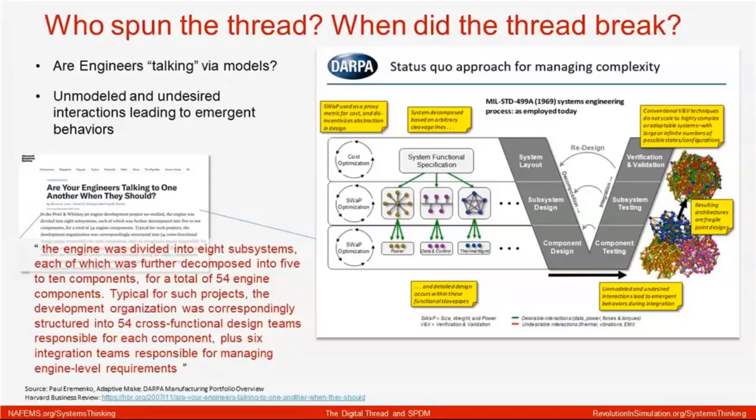So this study refers to two categories of interfaces laid out on a design interface matrix and a team interface matrix, to keep track of two types of interfaces: unattended interfaces and unidentified interfaces. Unattended interfaces being interfaces defined by the system's architects but lacking a corresponding team interaction. Unidentified interfaces being interfaces the team is working on but that do not exist in the system model. So the critical need for the simulation lifecycle manager tool is to enable this kind of interaction and keep both sides in sync.

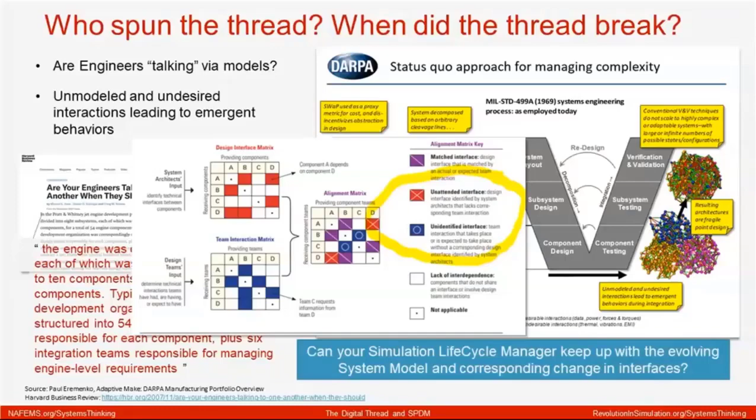When it comes to keeping the RFLP part of the system model honest, there is this search for a single source of truth. And this is something that is distributed physically, and even for systems of minor complexity, it's almost impossible to keep it in one physical box. It should be noted that the single source of truth is diluted by the assumptions made during simulation.

There is an equivalent distributed systems pattern in software architecture. It's called the enterprise service bus, where the idea of a logical concept of a bus is supposed to hold a single source of truth for all the software systems that are part of the interaction. Again, even in software engineering, that concept of the enterprise service bus is a distributed concept. There's no such thing as a single physical enterprise service bus. It is always distributed. The same thing happens here.

The equivalent in our world to the software world would be called a systems model. A systems model is not in one physical location. It is always distributed. So how do we keep track of this distributed architecture in a simulation lifecycle manager and keep it synced with the simulation model?

And while we do that, one of the challenges is that these models tend to be very multidisciplinary, and they tend to go around the various hierarchies on how we assemble the models in our product structures and in your simulation BOMs. And they are very multidisciplinary in nature, and also the abstraction varies. So if you think of the model complexities in each one of these three dimensions and along each one of these disciplines, the abstractions need to be made consistent between both the systems model and the simulation model. And that is one of the primary capabilities of a simulation lifecycle manager that needs to be kept track of before you merge it into the systems model. So that is a key capability.

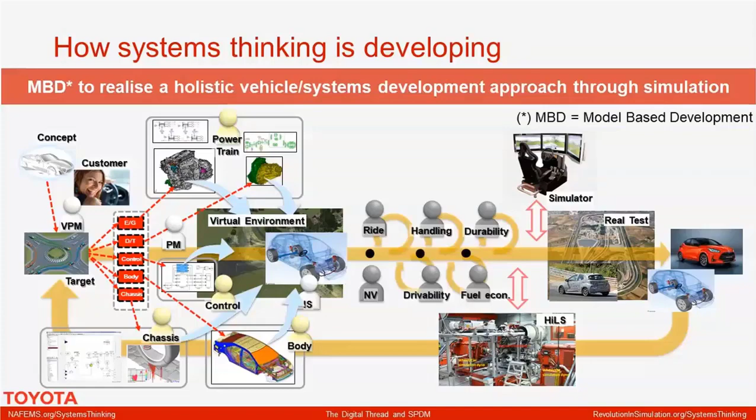If you have to imagine how this works in practice, this has to do with a huge amount of data flowing across different disciplines to realize such a virtual environment. However, the reality, from what I hear, not just in our industry, is that all these domains have their own legacy, their systems, their processes, and their data sources. So we have silos, these are complex data, and the result is that these require effort to extract and reuse in a holistic development approach.

So starting from this point, we tackled our proof of concept project on systems lifecycle. We concentrated on the scope to demonstrate the feasibility of improving the process between those who produce the data, like designers, and those who consume the data. So typically what happens when somebody has to realize a digital prototype is that the data, typically specifications, need to be gathered from a number of sources. The specifications provided typically by designers may be design targets or assumptions, or may come themselves from different data sources like CAD or test results.

Too often we see, maybe you recognize the icon, that our processes depend a lot on exchange of data through files. So our first goal was to reduce our dependency on these file exchanges. Our intention is to replace a process based on file exchange with a process where the information comes from a single source of truth for engineering specification, in a way that when this is fully developed, everyone can access the same place, and this would reduce the data gathering and review effort.

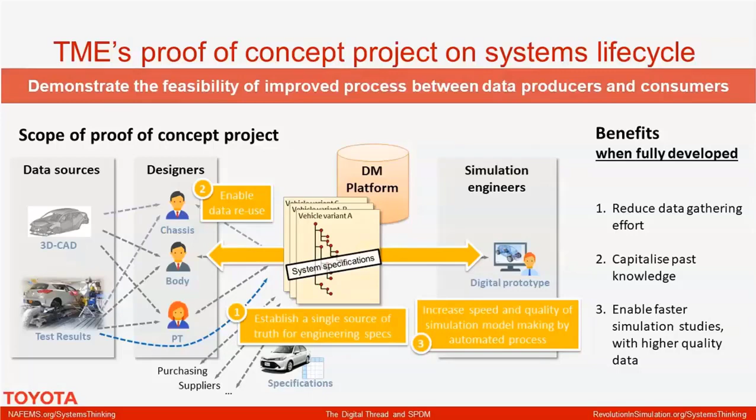Lastly, what we wanted to demonstrate is, once we have data there, whether we could use this to increase the speed and quality of the simulation model making process by automation, so that we could enable faster simulation studies with higher data quality. So this is the kind of scope I will be describing in the next slides.

I mentioned a single source of truth, and maybe some of you are asking, really? One more? Well, I think the data model we're intending should complement and integrate with existing PLM solutions. Try to bear with me on a timeline of typical vehicle project phases. The level of data detail typically increases. In the beginning, we start with requirement information, which is well managed today. As the data increases, we go into having a detailed product structure defined, typically with associated CAD data.

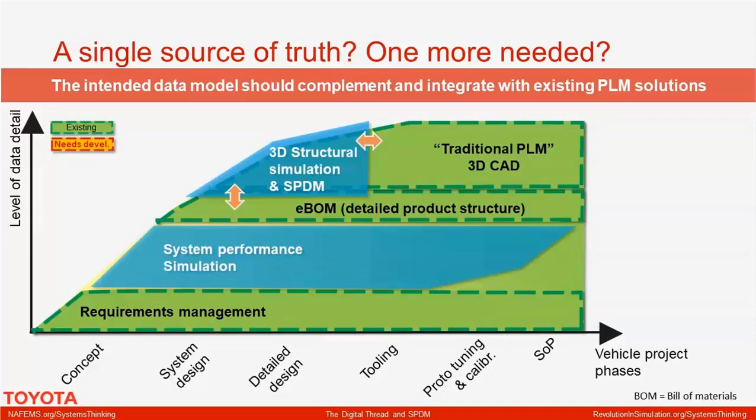And this has been traditionally well developed, and we have seen many examples of a good connection of this data with typical 3D structural simulation processing with all the related data management. What we think is not as well developed is the domain of system performance simulation, which is by definition multi-domain, and the related system specification structure to hold this data, with the requirement to be flexible enough to be suitable for multiple domains, and therefore by definition tool independent to support multi-domain process automation, but at the same time to be connected with the other sources we use during development.

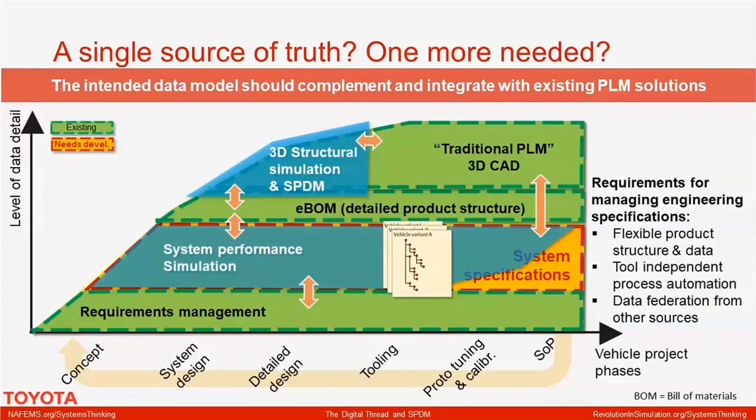So what does this system structure look like? Today it could be something as simple as a container for the parameters required by the existing simulation models in various domains, for example, a superset of the parameters for those models. But while we evolve our thinking, this should be flexible enough to support more formal methods, like technical breakdown structures or RFLP or SysML, in a way that this data model is really ready to support real systems lifecycle management. Plus, of course, this should be able to draw, when available, on information in different data sources.

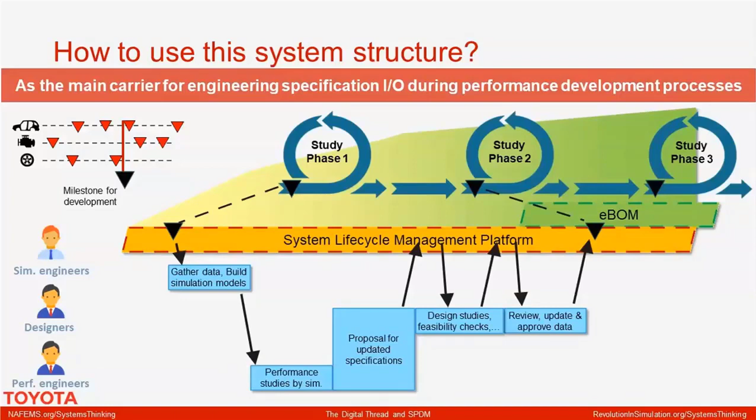Okay, how to use it practically in development. Not all the systems have perfectly aligned development schedules, so the idea is that at certain milestones we'll need to realign. What typically happens is that from this platform, the simulation engineer would gather the data and build the simulation models, so that the designers can get the results from performance engineering studies, get back into the platform with proposals, get back into design studies for feasibility, maybe with suppliers, reviewing and finally certifying the data for the next phase. This means that everyone should have access to the same up-to-date specification across the different domains.

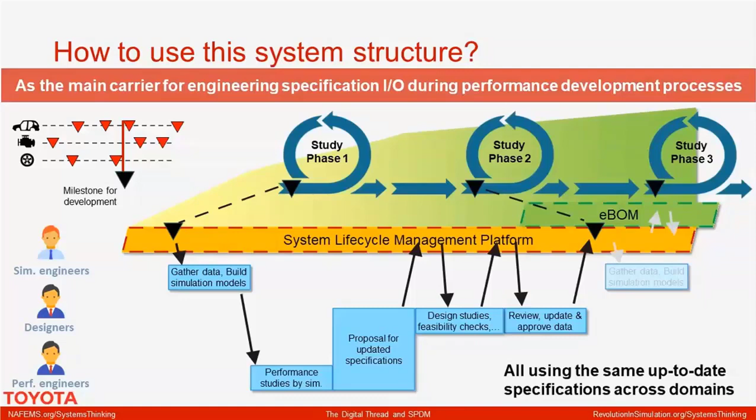Okay, practically, what was our proposed system-centric approach? We worked on the development of a data architecture. In this case, we used Aras, which provided enough flexibility. We relied on a mixture of built-in data types, like the concept of system, and on top of this, we built some custom data types, which I will explain in a minute. So we have a flexible data structure that we can use from an early stage, and what we call engineering data containers, which can handle groups or collections of data, which are all the data needed by simulation models.

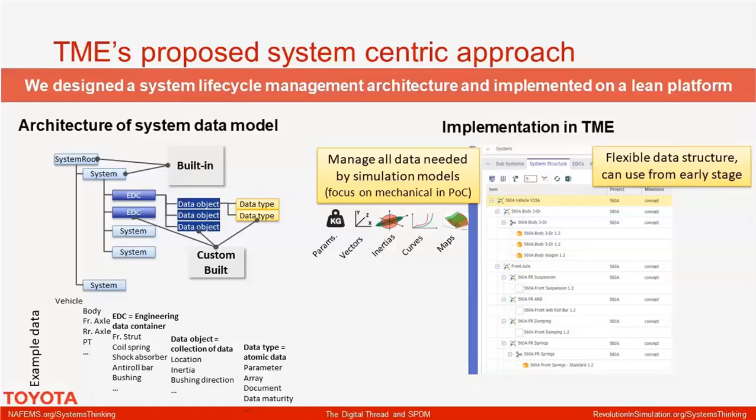In our POC project, we focused on the mechanical domain, so we had to manage things like parameters, vectors, inertias, curves, or maps. On top of this, of course, we expect from the PLM backbone all the typical capabilities like access control and the capability to link other sources, especially to manage variants. This is of fundamental importance, and of course traceability of all the changes.

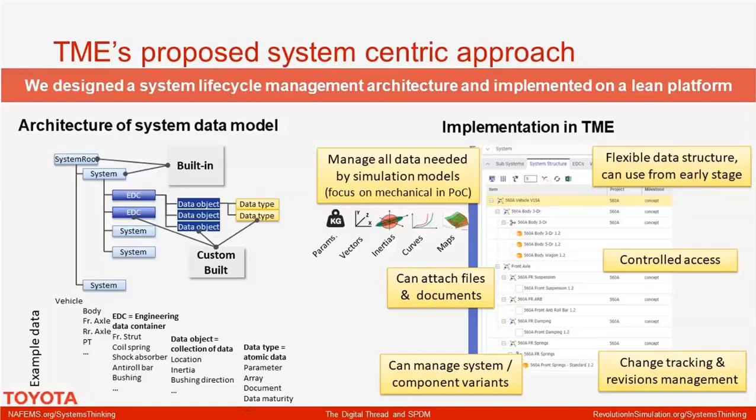Now, this kind of data model sounds quite complex. So our concern was, how do we get people to use it? We need to think about usability, and we tackled this by creating a user-friendly graphical user interface, because people are typically working with spreadsheets, as we said. We know all the troubles, but these are very easy to use, so they're well accepted. We wanted to get rid of all files, but retain that kind of simplicity.

So what we did was develop a spreadsheet-like interface. We have developed facilities with which, based on the data structure, the related GUI in a spreadsheet-like interface can be generated automatically to present the data for input in a very user-friendly way, with all the typical features like copy-paste, editing arrays, and so on. It's fundamental that this is automatically generated, because then you keep the flexibility of being able to adapt and create new engineering data containers for whatever application domain.

Okay, the next is about the capability to reuse the data, to capitalize on this data. We need to make sure that once we invest in storing the data on such a system like a lifecycle management platform, this can be easily accessed and reused, because this is actually the base for value. You remember I mentioned commonization, I mentioned reuse, but also think about the possibility for data science, artificial intelligence. For this, we need high quality metadata, and this is the way to get it very quickly.

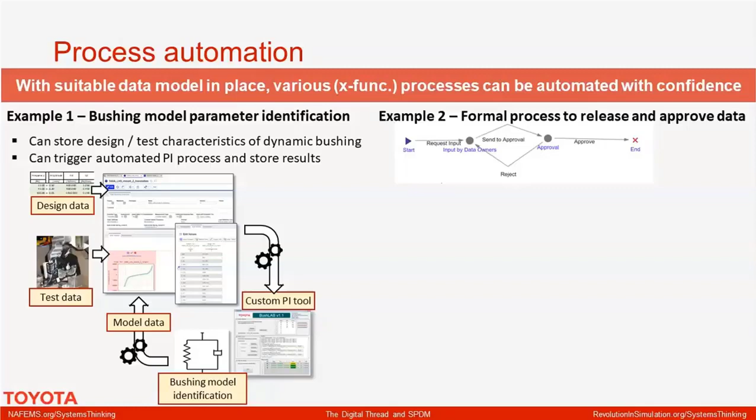The second example is about the formal process to release and approve the data, which is fundamental to make sure that not only the data is up to date, but is guaranteed to have high quality. So you remember I mentioned before the milestone. So what happened is that at the milestone, there would be a model owner which would kick off a request for a modeling process. In this engineering data container, we can associate who is the data owner. And this data owner can get notified of a request to fill in the data.

This guy can enter the data or just check that from the previous to this phase, basically his data has not changed, and can mark it as checked for his manager to be notified when the data input has been complete, and then can go through the typical review process. So once the engineering manager approves the data, then the data gets released, and we are sure about the data origin and quality.

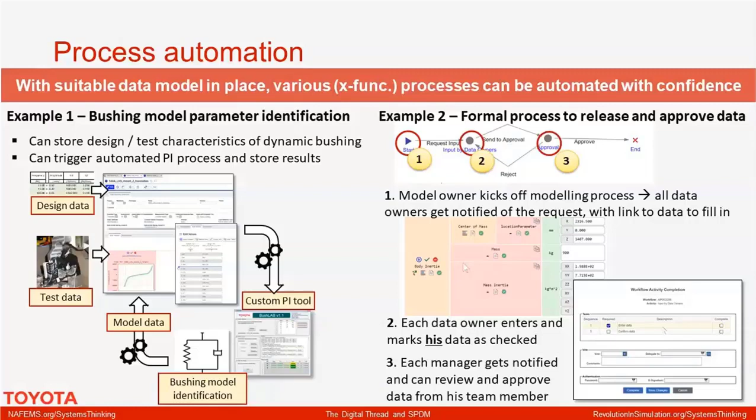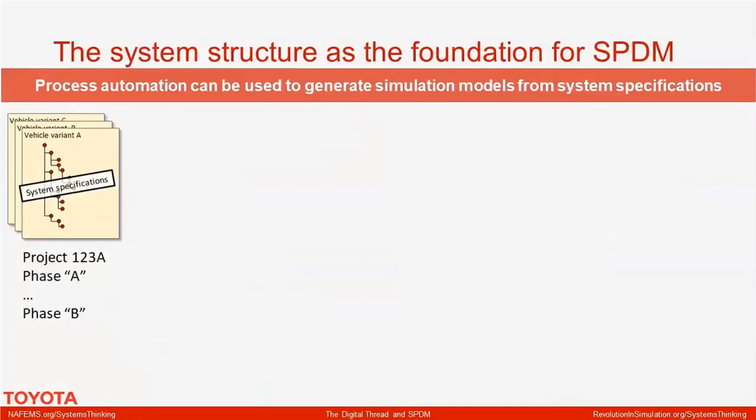Okay, so far we didn't speak much about the simulation. So let's get back to how to use this system structure as a foundation for SPDM. Now, we have a complete system specification, which is managing information about variants. It's traced across the development in different phases. So at a certain point in time, we can ask for resolving a variant to get one specific system. In case of a car, it's one variant of a car for a specific phase.

From this point, then, I mentioned before we wanted to use this data for simulation models, which may have a different structure, what I call here the simulation BOM. We were able to demonstrate the possibility to create simulation modeling rules which are able to place at the correct place in the simulation BOM the data coming from the system specification structure. This is an example of a multi-body model, a simple model. We can place the data for the flexible body, simple powertrain model, all the dynamic bushing, and so on, provided, of course, that we have the correct simulation model templates in place.

Finally, by one click, we can get the model ready to run. Now, this is fundamental because what we are showing here is the full traceability of the data in the model from the system definition. So we're going from a system specification lifecycle to the simulation model lifecycle, which is not shown here. That's the part of the digital thread which follows.

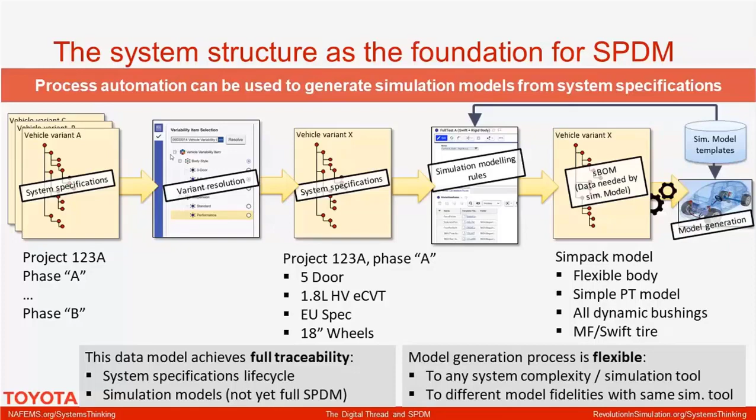This is fully flexible. I'm showing here an example with SIMPACK, but basically if the system specification and the related engineering data containers have been designed correctly, this can handle any system complexity or simulation tool. Or even throughout the project, maybe at the beginning we would use a more simplified system representation, and later when more information is available, we can use a more detailed representation. So we think that with this, we managed the basis to handle simulation complexity and even enabling the digital twin.

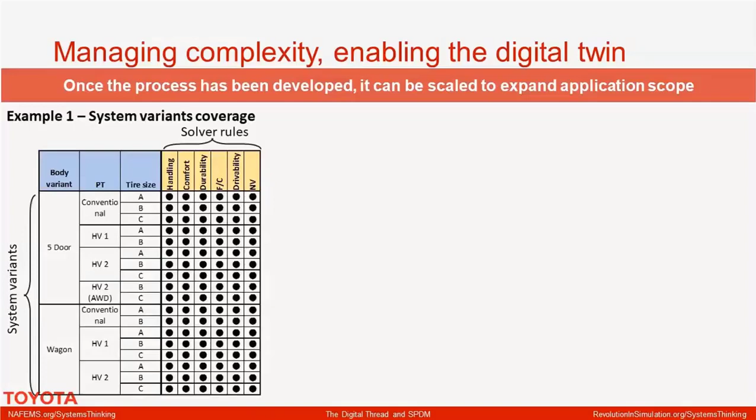Let me talk a bit about the scalability of this process. So what I showed now is the capability to handle system variants, so the actual system specification in the various variants throughout the life cycle. And this is basically what I have in my rows in this table. And then by the solver rules, I can translate this into simulation models for various disciplines. Now, this is the basis for doing this with full automation, which enables a full coverage of the virtual validation, or just selecting what would be the worst case for physical testing. Because for us, generating one model or 100 model variants would be the same in terms of manpower.

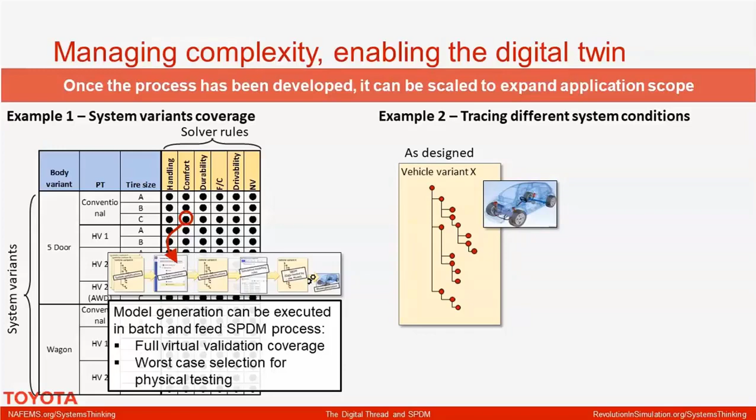Example 2, how do we get from here to the digital twin? We can trace basically different system conditions. So we can say, for example, that the system structure at the end of the development process would describe the system as designed for a specific variant. But maybe for that variant, we are building a prototype where something is built in consideration of some constraints. Maybe the supplier part is not the final prototype part, so we reuse something else. So with this kind of flexibility, we can manage what actually would be the content of the actual physical prototype. And we can update the system with data coming from the field, only as a revision of a previously developed system structure.

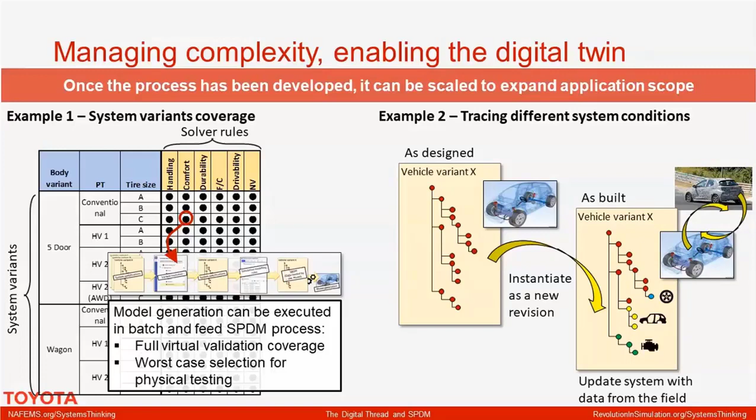Okay, so I think we explained somehow a vision for what to do with the connection of the digital thread to the SPDM world. There is still a lot of things to be done. First of all, we have to consider still how to build the rest of the simulation tool chain. Our vision is that in the future we would have a one-click process, no more from a simulation model to a performance evaluation, but from an engineering data set. Because through the selection of the load case, in the background we could have the model generation with appropriate level of fidelity for that specific load case. And this data can then be traced back by the requirements which are associated with the system specification. If we are able to realize this process, there is no more data copy-paste, manual process, and so on. And it means that anyone who has access to this system lifecycle management platform would be able to leverage the power of simulation models to predict the holistic system performance.

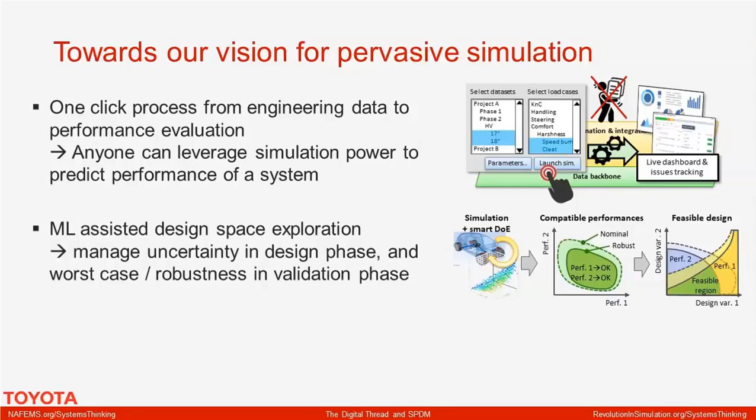Once we can do this for 1 or 5 or 10 simulations, maybe we can do this for hundreds or thousands. And therefore, we can enable an easy way to do design space exploration, maybe assisted by machine learning algorithms. This way, we can really unlock the simulation power to handle uncertainty, maybe early in the design phase, or assessment of the worst case detection, or robustness considering the variability in a validation phase.

And last but not least, still talking about digital thread, we need to consider how to integrate this with other existing processes. For example, we would like to be able to feed the data and the system structure from other sources when these exist. Think about all the data that you may already have in your existing PLM system handling detailed product structure, engineering BOM. So for example, typical would be information about mass and inertia. This could be extracted automatically and then connected to the data of the specification at the system level. So in general, I think there is still a long way to go to realize the full digital thread with the benefit, but I think we have a good path ahead.

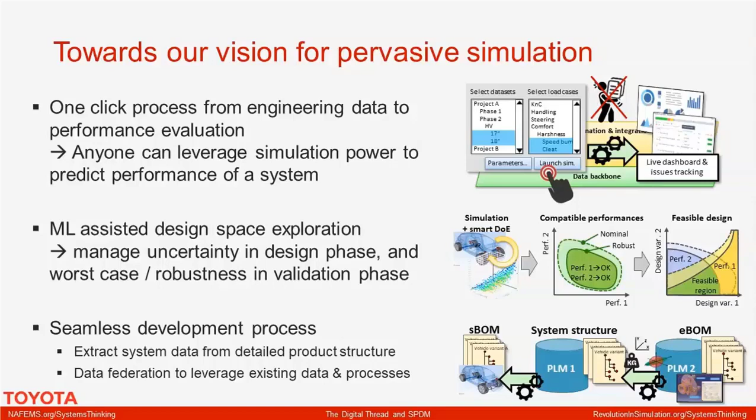So in summary, I think it was quite a good experience with this proof of concept project. We believe that the enterprise deployment of simulation process and data management is a quite steep path. We moved firm steps in the right direction.

We demonstrated the implementation of a system-centric engineering data model, including the feasibility of a flexible single source of truth for holistic thinking, for systems thinking, with all the related engineering data live that can be easily reused. We thought about making this easily accessible and reusable for either man-driven processes or automated processes. And in particular, with process automation, we demonstrated that we can actually unlock more efficient cross-functional collaboration.

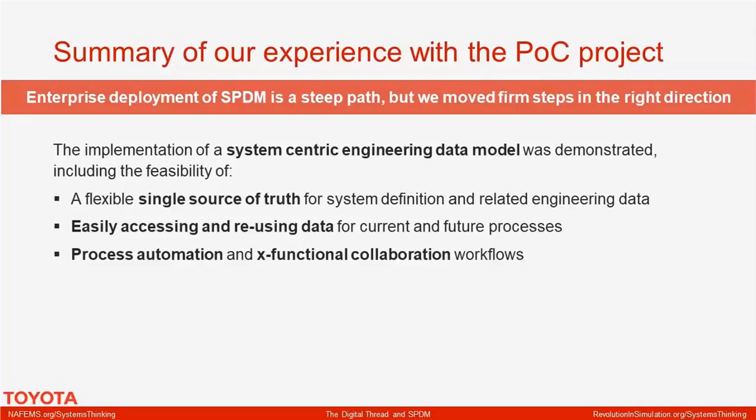So with this, I would like to move to the conclusion, getting back on what Jay presented. Maybe Jay, you want to make some comments about the key takeaway points?

Yeah, so to cap the discussion here, one of the key takeaways I would say is that when you design simulation models and the interaction mechanics, be aware that the single source of truth changes over time. It is logically single, but it's physically distributed. So you need to plan ahead for the simulation workflow and model interaction to evolve and keep up with the system model. And you saw one particular good use case of how Ernesto does it.

And again, one of the questions which I'm going to pose to you, Ernesto, during the Q&A, is what was the role of suppliers and your vendors, how you distributed the system model? That's a question I have for you later.

The second takeaway is that the SPDM or SLM architectures have to support distributed and collaborative simulation. So when you start collaboration, the kind of parameters, the kind of model interactions that you assume keeping it in-house, that changes drastically. So distribution and collaboration is not an easy topic. The simulation world hasn't scaled up to that yet. So the current PLM-based architectures cannot keep up with the complexity required for multidisciplinary, multi-physics simulation data management.

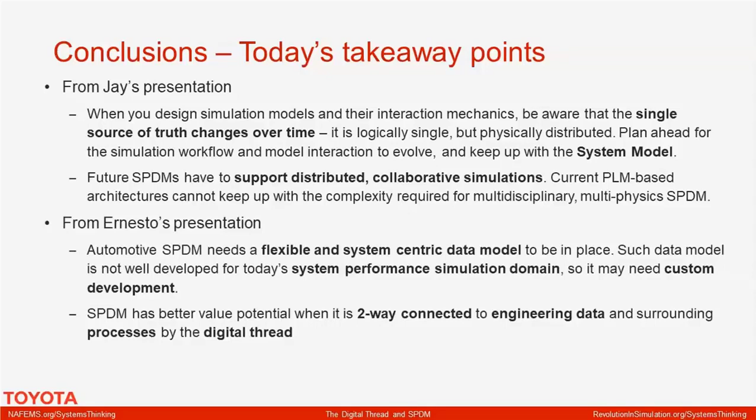Your turn, Ernesto. Hi, thank you. Okay, from my side, indeed, we tried to touch upon some of these ingredients. Our key point is that before we start talking about simulation process and data management from a system thinking perspective, we need to consider a flexible and system-centric data model. Without this, we would really struggle to build upon some efficient process. We think that historically it's not been very much developed.

It's something quite new. So in general, if you want to consider a system performance simulation domain, you may need to consider some custom development. It's difficult to imagine an out-of-the-box solution which is truly tool independent. And then I hope I could show you some hint of how there is better potential for utilization of simulation when this is actually connected across domains to engineering data, and can realize process automation with surrounding processes by digital thread and node-related automation.

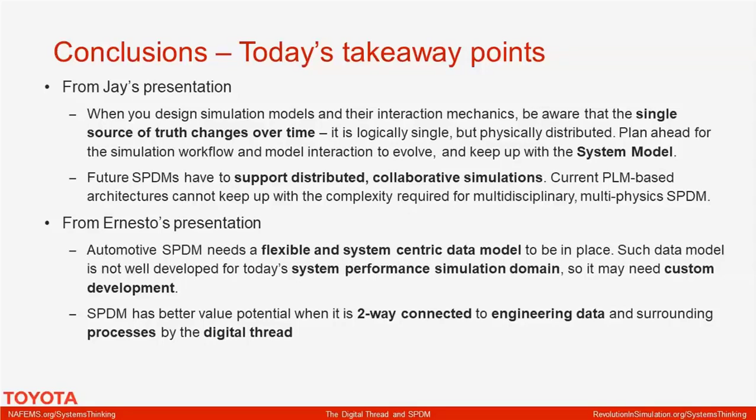Okay, so I think this is the conclusion today. There's one more point I would like to touch. It's quite a complex matter. It's quite tough to move along. So I would like to use this opportunity from NAFEMS with such a good audience to have a call for action to accelerate this SPDM development.

So we said, okay, this is not just one domain and one tool chain. Today I presented what is closer to my professional experience. But in general, what I've seen is that we always have new technology. We don't know if tomorrow we'll be using the same simulation tools and tool chains as today. So we need this kind of flexibility. Therefore, we need a truly tool-independent process integration.

I hope I could explain through the example of our POC what I mean by having an open and flexible data model. We didn't touch much on open APIs and standards to connect the different processes, but I think this is really also key to be developed. Considering also that the customization we're talking about should be managed in a way that doesn't create what is called technical debt, so the problem of being locked into something that cannot be easily modified.

So with this in mind, I would like to call for teaming up at a pre-competitive level between like-minded people across industries to accelerate the needed technical development, like discussing together what kind of requirements need to be implemented, what are the different technology assessments which have already been ongoing, and working with vendors to jointly develop demonstrators like the one that I presented. So I would like to conclude with an invite to get in touch if you are interested in such a collaboration, because I think we can have a lot of potential from learning from each other and working together.